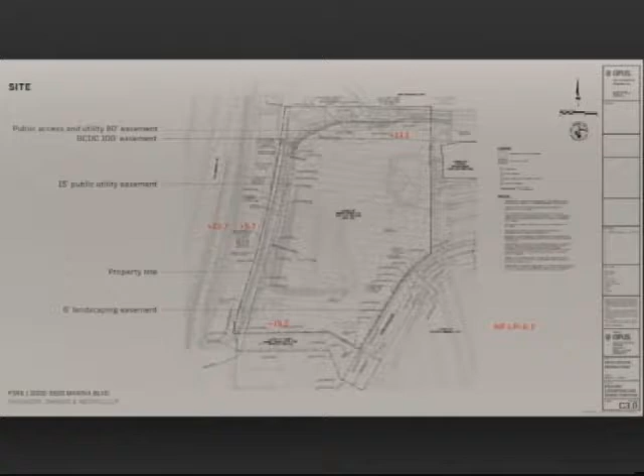Let me quickly introduce you to the site. North is up here - on the north side we have the bay, and on the left-hand side we have a slough, an important body of water running almost the length of the site, down in a ditch. We have neighbors to the right and to the south, and access to the road. There's a small easement on the left side of the site, and BCDC easements along the north, and now we think along the slough side too. This was a previously approved entitlement for the site.

Those at home can't see the model, but I'll just hold it up for you.

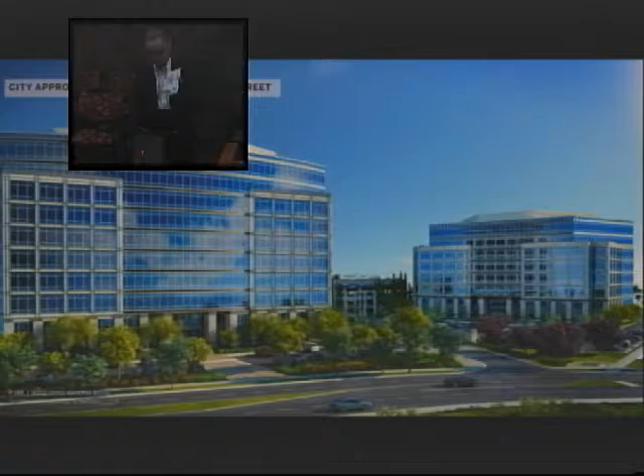This was the previous proposal: two office buildings, a 10-story office building, an 8-story office building, and a garage. The garage ran along the west side of the site on the 101 side, with surface parking between. In our mind, this was a suburban model in terms of on-site parking.

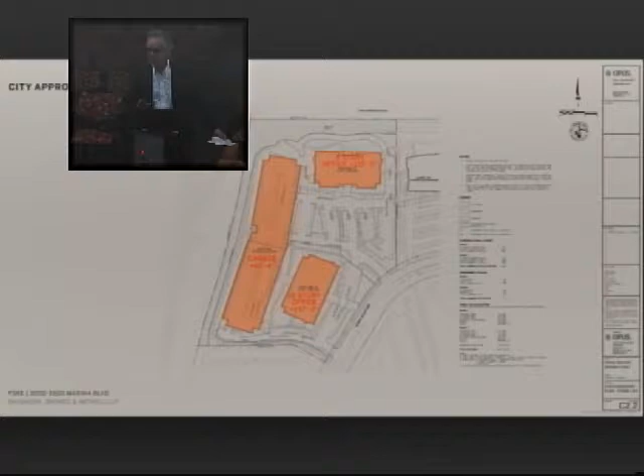It also presented the parking garage to the 101 side. In our feeling, it didn't necessarily embrace the bay, the bay trail, or all the public amenities we saw were possible on this site.

This is the view from 101. You can see the garage in the foreground here, and then this is the site toward the water side.

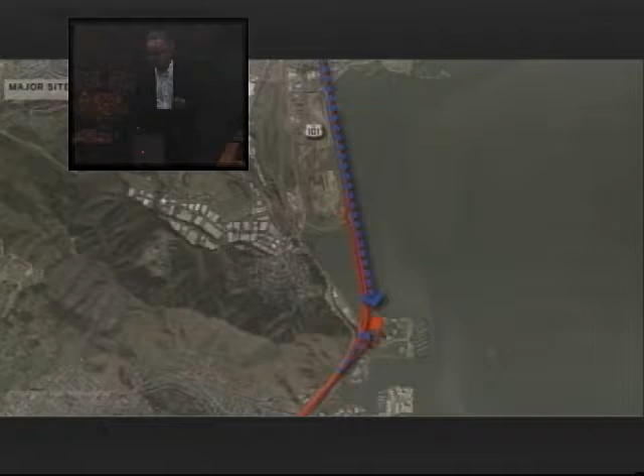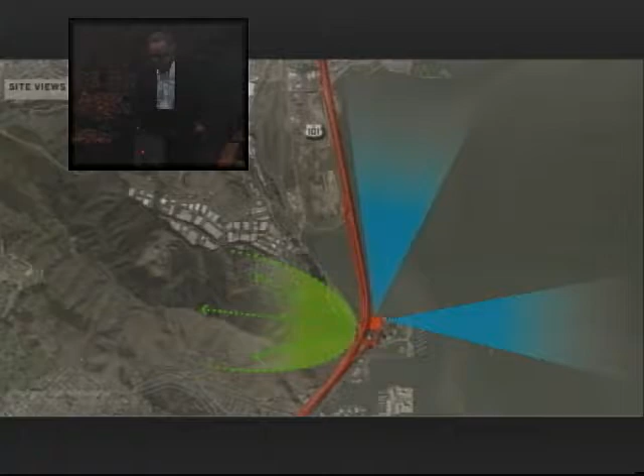From our point of view, this site has incredible visibility, so we want to make sure we take advantage of that on 101. The site also has incredible views toward the bay, toward Oakland, and back toward San Bruno Mountain. It's really a terrific site, and we want to exploit those views and take advantage of them.

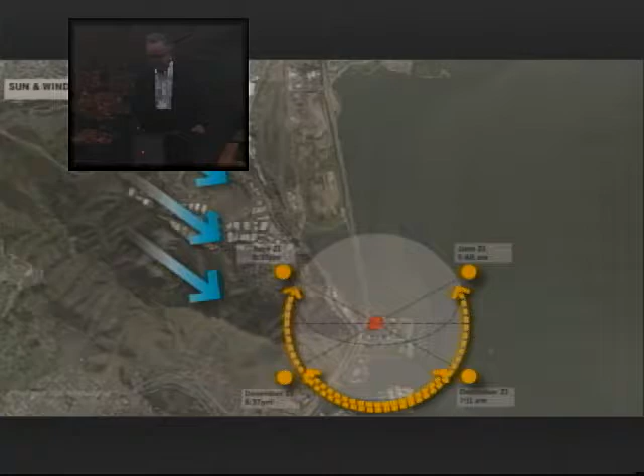We are aware of the wind and how it comes down the side of San Bruno Mountain, so we want to protect any public spaces that we can. We're also very aware of how the sun moves through the site, so we want to make sure the public spaces get as much sun as possible.

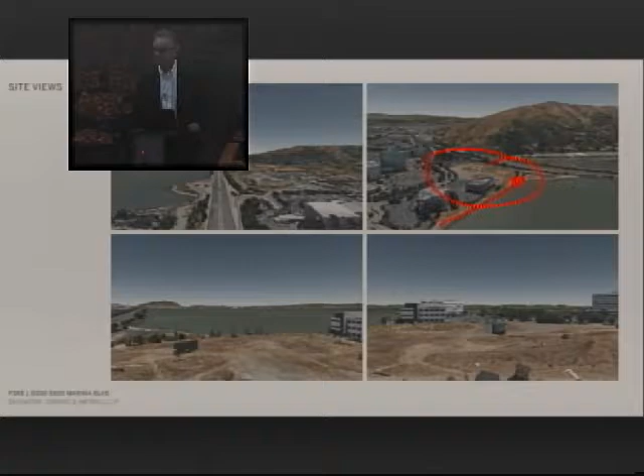As Mike already mentioned, this is a life science building, but it's also a life science campus. What's been very important is bringing other amenities to the site: fitness, dining, restaurant, and event spaces.

Creating not a standalone building, but really a series of buildings that work together, opening a lot of these public amenities to the public and having that be part of the life of this campus.

We have parking, and we'll show you this. This is built over fill, so we are actually building up from this site. We can't go down—we have a clay cap they have to deal with here.

We're a life science lab office use, so rather than targeting—last time we were here we had a long discussion about parking for office spaces versus parking for lab spaces. Lab has significantly fewer people involved, as well as the client's experience with their property just down the road in South San Francisco.

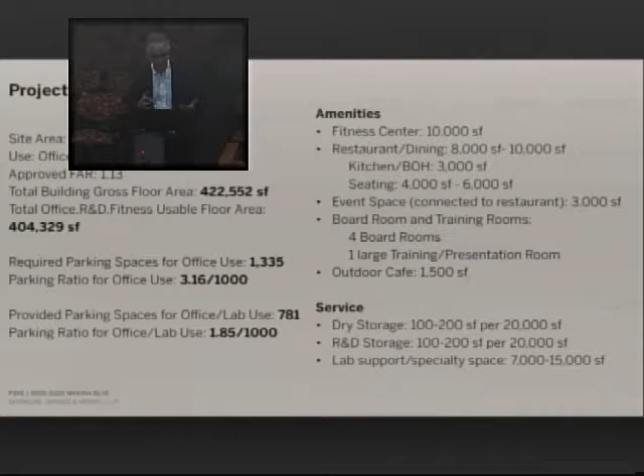In terms of what they're seeing in terms of uses, we don't want to overbuild our parking lot. We'll go into much more detail on parking in a moment, but we're providing 781 spaces, roughly a 1.8 to 1,000 parking ratio.

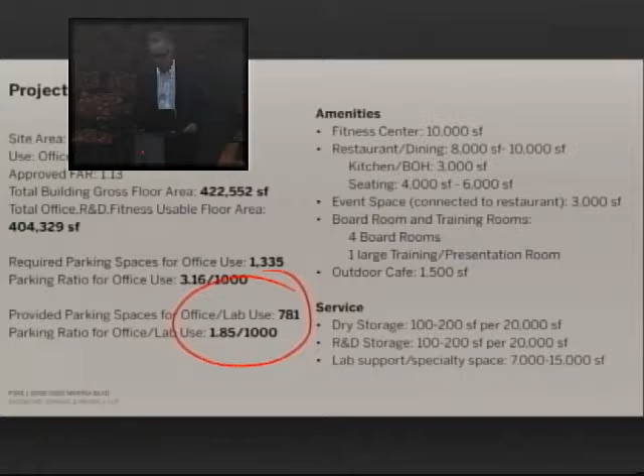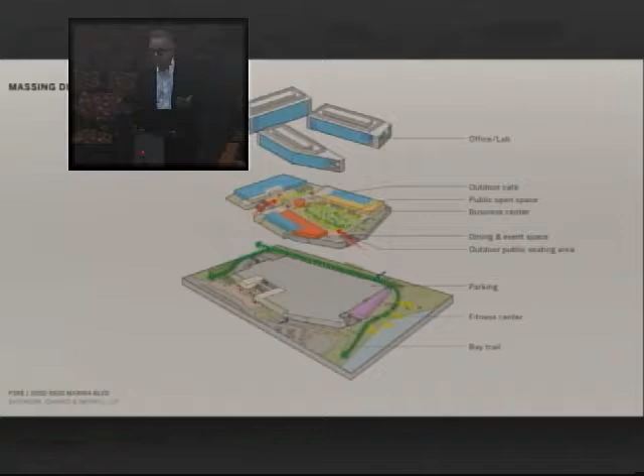When we last presented, the ideas were similar, but they've been modified. This is a drawing we showed last time. It shows the bay side on this side. We have two levels of parking.

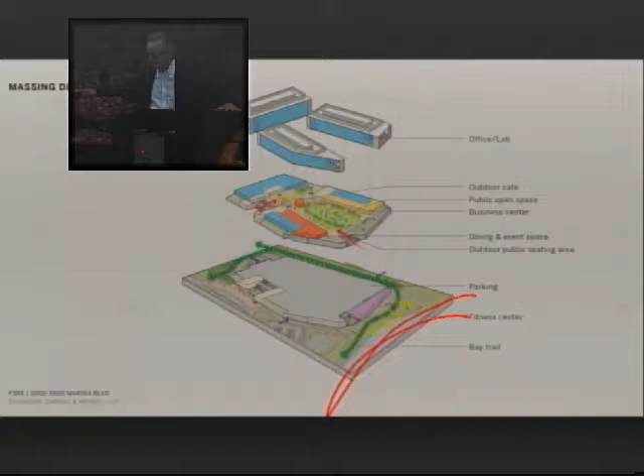We have an outdoor public space that serves as a courtyard above that, and then lab and office buildings on top. This gives us a chance not to spread the parking out all over the site, but to actually build a public space, an open green space in the middle.

There are other amenities we'll go into more detail on, but we have a health club right basically at grade along the Bay Trail, and developing those amenities adjacent to the trail has been important.

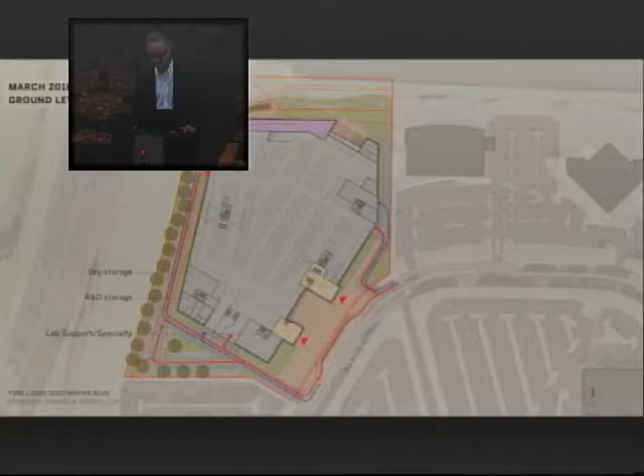This is our ground floor plan, where we have a lay-by along the street here, entrances to two of the buildings. The red lines show the access to parking.

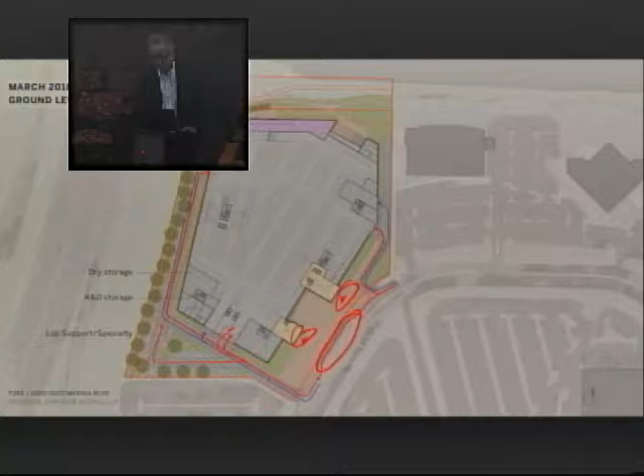The blue lines show the access to service, so we have service loading docks under each of the buildings.

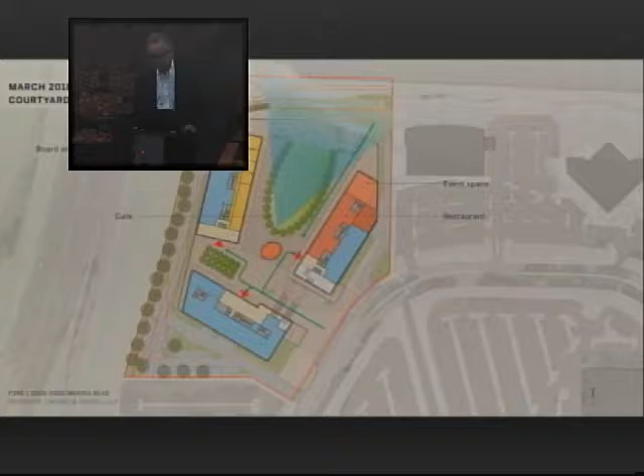If we go up two levels of parking, we have this open space with its view toward the bay. As you stand in that space, you really look right toward Oakland that way, and up toward Candlestick the other way.

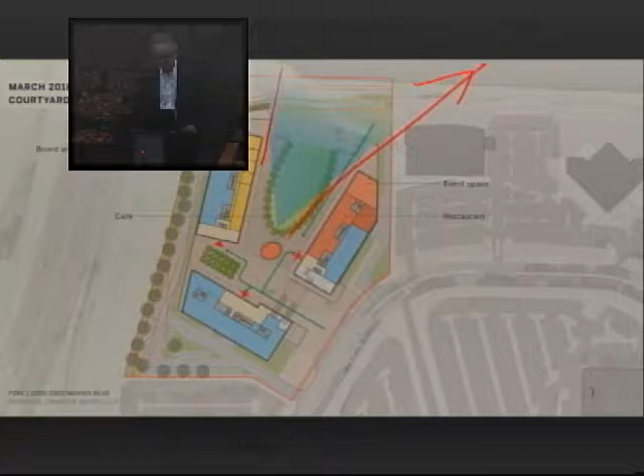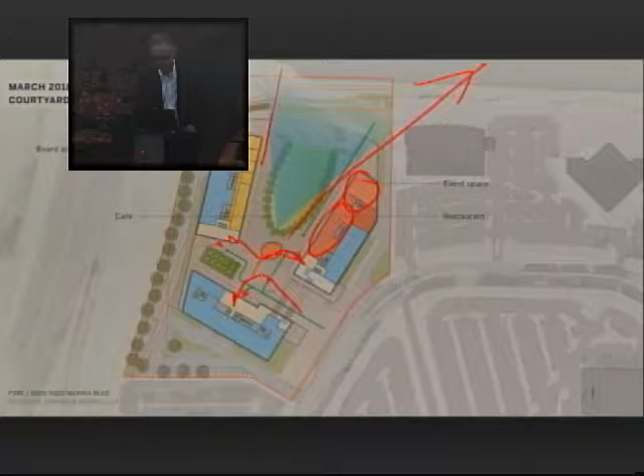We're able then to move up into the courtyard, into these office lobbies. On this level we've loaded restaurants, event space, boarding, and a cafe in the middle. We're trying to activate the edges of this, and we see this as open not just to the users of the building, but to the public in general.

As you know, currently Sierra Point doesn't have a lot of amenities, but the idea of creating a raised space where you can see out over the water and connect to the landscape, we think not only enlivens this project, but could help enliven Sierra Point in general.

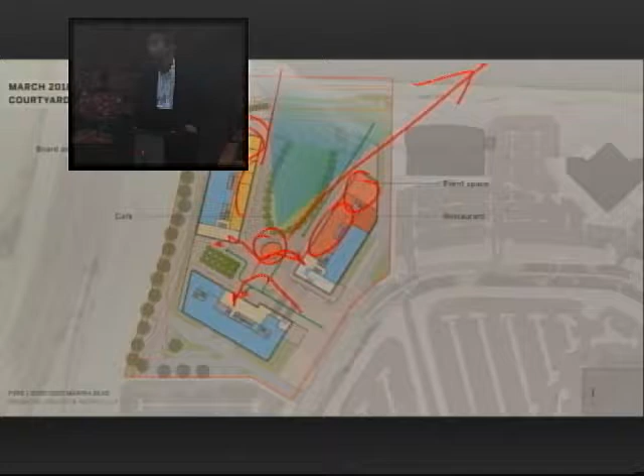This is the previous plan. We'll show you some modifications. We had 120-foot wide bars of lab and office, and we've modified that now a little bit, thinned it out.

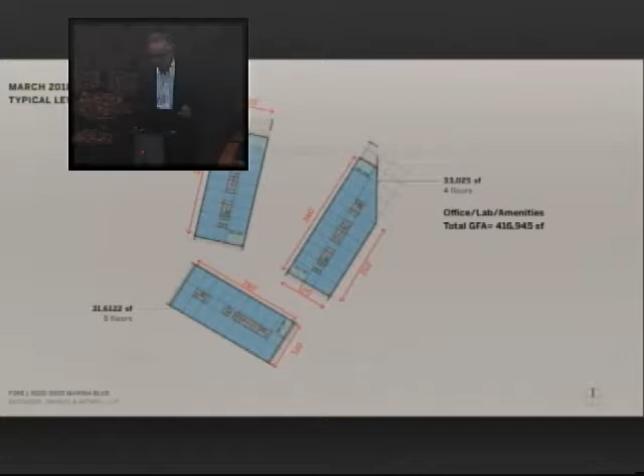Let me tell you some of the comments we heard both from your commission and also from BCDC, which was really focusing on the public access and public amenities. One issue that came up was disabled access, ADA access up to the upper level. We were relying on elevators, so we've now added a ramp that will get you up from the water side. We are providing additional amenities.

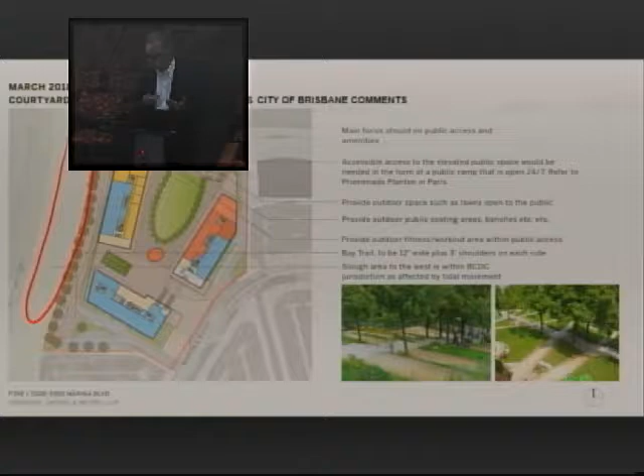I want to emphasize the conversation we had, both in our smaller working group, about the slough area directly adjacent on the west side. This is a sensitive part of the bay, and there's a lot of concern about how that gets used, how close development is to it, and what the Bay Trail does, and whether it comes too close.

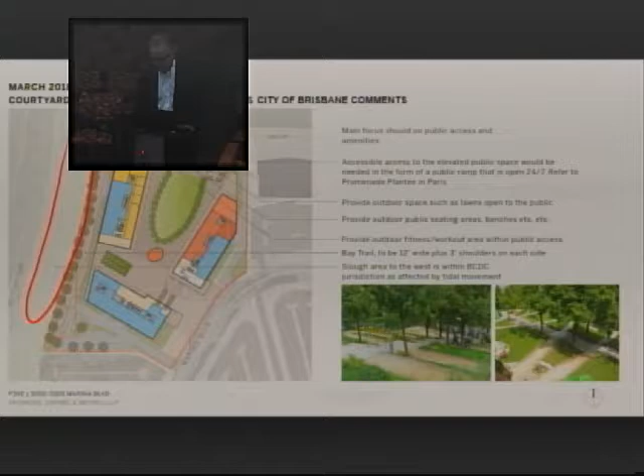There's a lot of contours in there, and in our previous proposal we had a couple of retaining walls that were, I think, a point of focus for us. So we looked at that carefully, and we've stepped back a little bit to see what we can do to improve that west side.

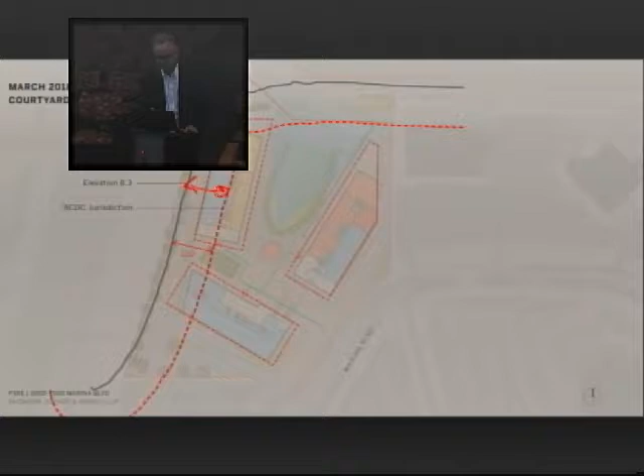We've stepped back our project roughly about 60 feet from where it was. You can see this is the 100-foot setback for BCDC, and we're taking that as a guideline, stepping back from the west side, from what would be the high water mark along the BCDC side on the left, and we've moved our whole buildings tighter, stepping out of that zone.

We're doing this for a couple reasons. One is when we tried to get our road, our fire access, and then a BCDC wide trail - which was a bike lane plus a walking zone plus some buffers - we ended up having to put retaining walls out, still on the property, but into that slough zone. Our strategy now was: let's just not touch that.

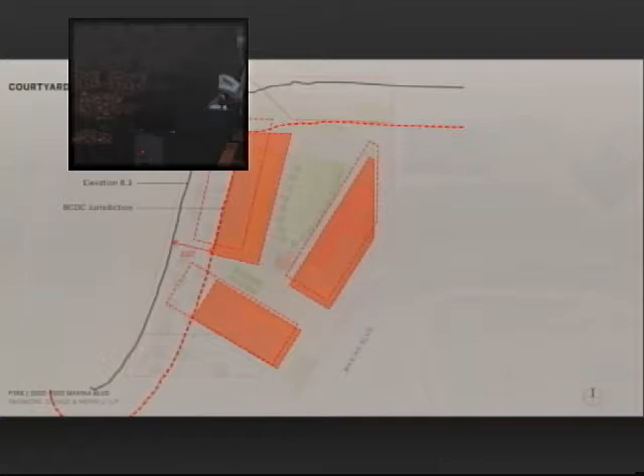Let's step back and give enough room for a trail, basically following the existing grades, with enough buffer zone, and we'll move our building back. We had our courtyard in the previous scheme, something like this. Now we're squeezing the buildings a little bit closer, so the courtyard is something like this. I think the essence is still there.

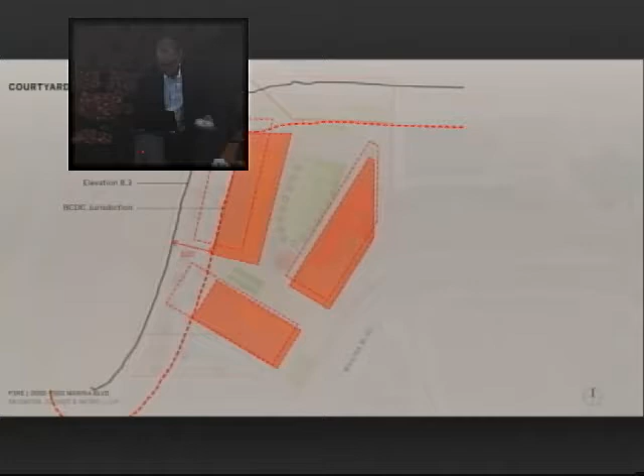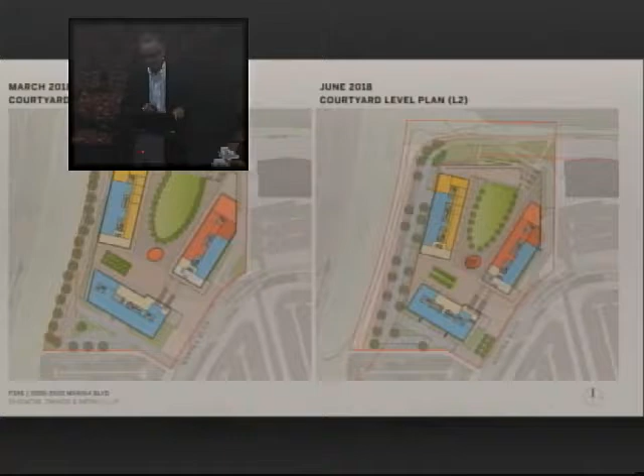Let me go over some of the details and the impact it's had on the project. Here are the two plans side by side, with our previous plan on the left and the new plan on the right. You can see we've stepped it back. Of course, we've lost two levels of parking inside the parking garage, but we've replaced that with some at-grade level parking. That's provided us a little buffer, a little setback zone along the western side.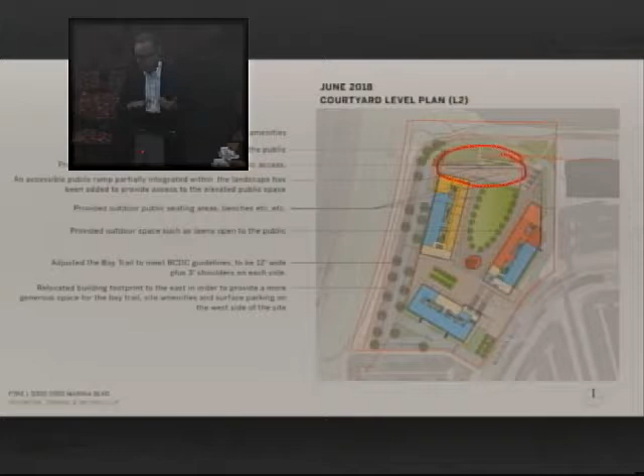We've also added a ramp access - maybe a little hard to see here, I'll focus in. Since you're going up two levels, it's quite a long ramp, but we've embedded the first part of the ramp in the earth, in the landscape. We come up to a landing, with a set of stairs that connect down here to that landing. It goes up, then comes to a terrace level just a little bit below the upper level, and then you take the last step up.

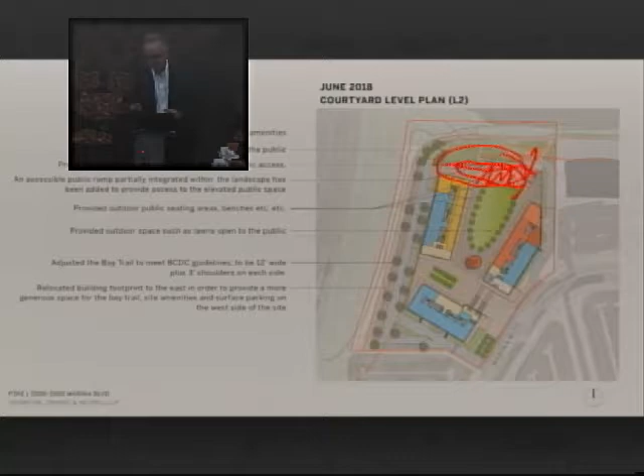We're doing this for a couple of reasons. We wanted to be able to step the site down toward the water for sight lines when you're in the courtyard. We also wanted to zone the courtyard, so we have a green area - more of a picnic green in that elliptical area - and a lower seating zone that looks over the water. Then the ramp comes down and the health club is underneath that, so this is sort of stepping down the terracing here.

We've also provided outdoor seating and a bit more recreation area in front of the health club, so the health club can spill out, but also so people running along the BCDC or the Bay Trail can use that for stretching or a workout zone, maybe even with some workout amenities there. We've then continued the trail down the left-hand side outside the parking zone.

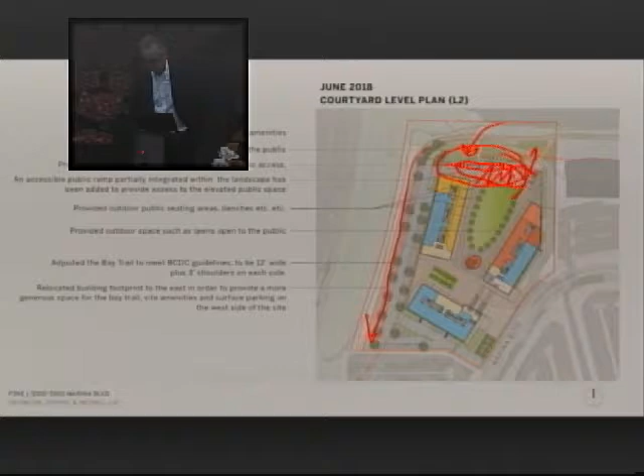This could be a really significant addition to Sierra Point. It's a little hard to see, but the green line continues the trail around and down. Phase 3 has purchased the site to the south, so we're working with them to extend the trail all the way down and complete the loop at Sierra Point, taking us down to the intersection just below the building on the lower left.

We would take that bike trail and walking trail and buffer zones and just continue it all the way down.

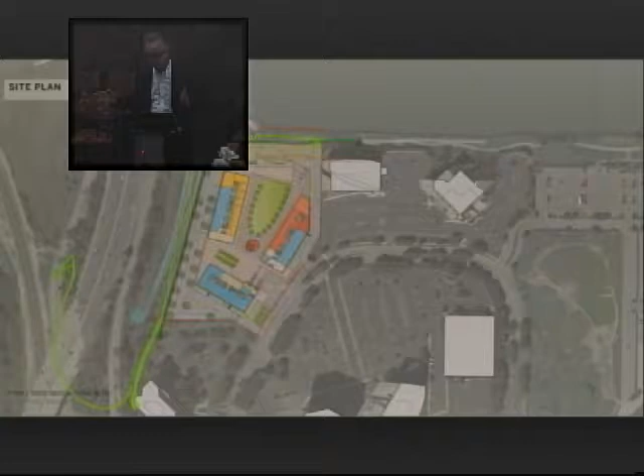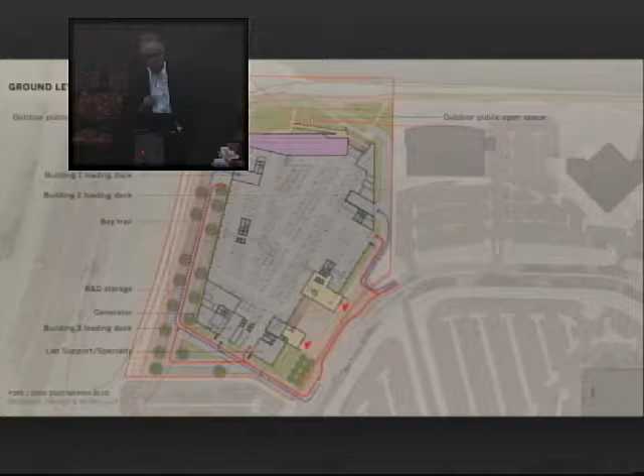This is the new ground floor plan. You can see the access is similar. We're probably providing some bay access parking at the very end here.

We have 781 parking spaces on the site. We have access to the parking directly adjacent to us on the property below. We have 127 surface level parking spots outside the structure.

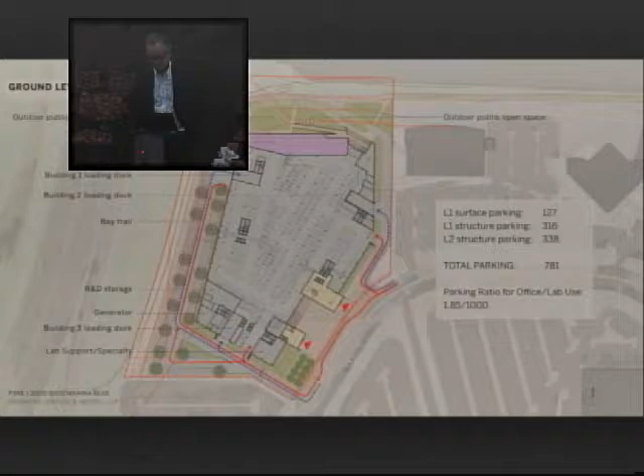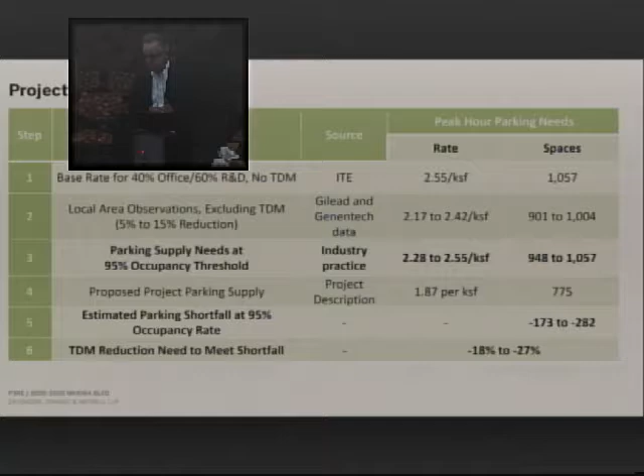We can discuss this in more detail, but we're looking at parking demands and comparing other parking opportunities in terms of office and estimated supply and TDM reductions. We'll swing back to this, and maybe Hardik can talk a little bit about that, and potential TDMs we can work out in more detail.

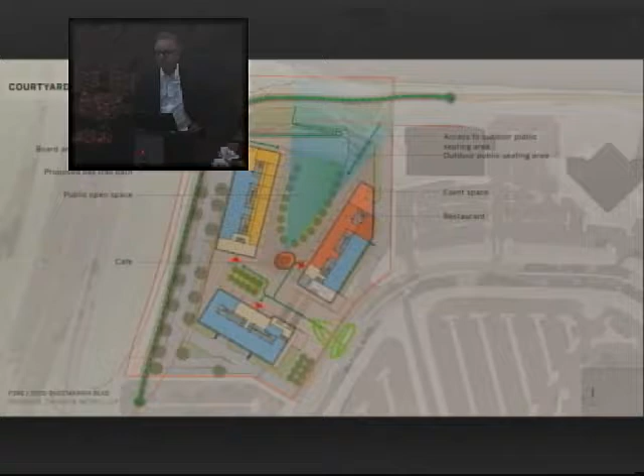We've also bermed the earth up against these two sides. Like the cascade of earth that comes down on the north side, we're berming the edge of the earth up against this face, so these buildings sit on top of a green base.

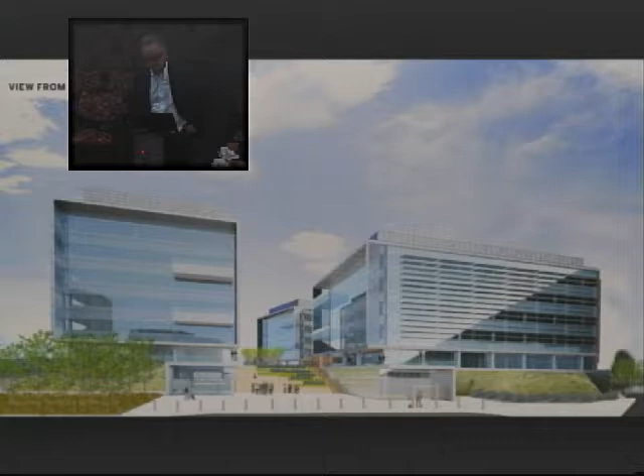We have a fire truck access that we need to provide around the edge of the building. The zone out by the bay, that dash zone there, we're doing in turf blocks, which is a planted surface that you can drive a truck over.

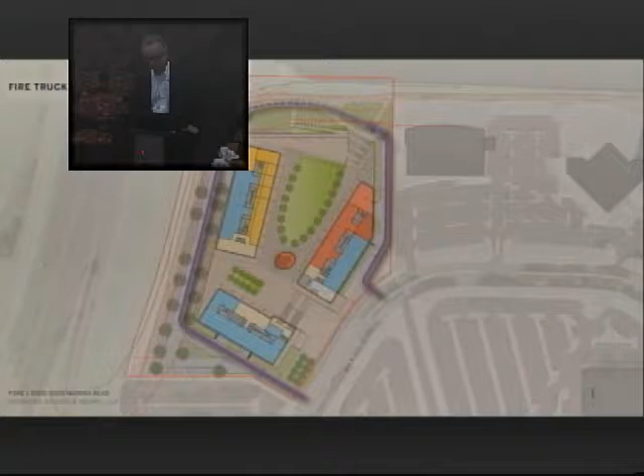A little more detail on the landscape. We are mixing trees in with the parking on the left-hand side.

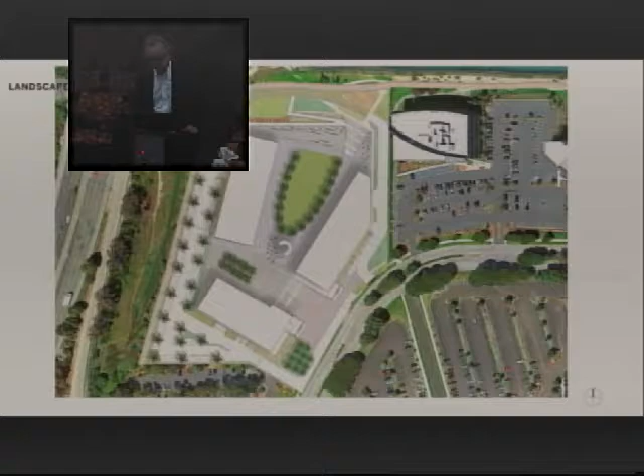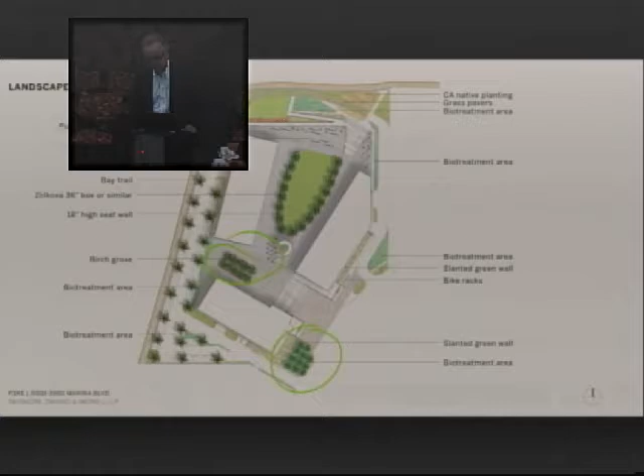The images below give you some sense of some of the elements we're using: the Great Lawn, the Creekside Bay Trail, the Birch Grove, and these slanted green walls along the side of the parking zone.

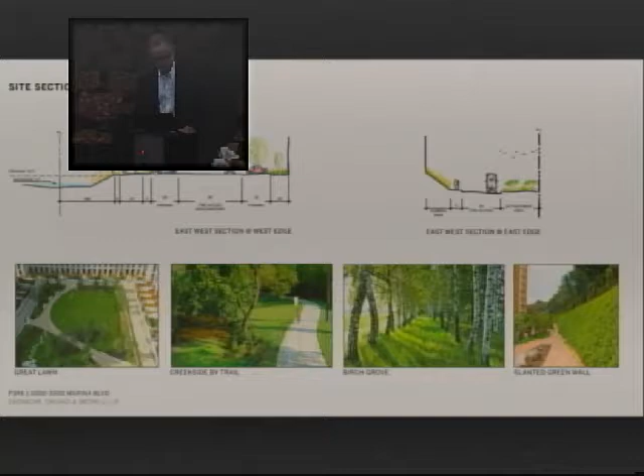The left-hand section is the section by the slough. Let me zoom in on that a bit, it's hard to see at this scale. We are following the existing grade down in this area on the left-hand side. We have 3 foot of buffer, 12 foot of bike path and walking path. We have parking on either side, and then 10 foot of a bio-treatment planting zone up against the building face.

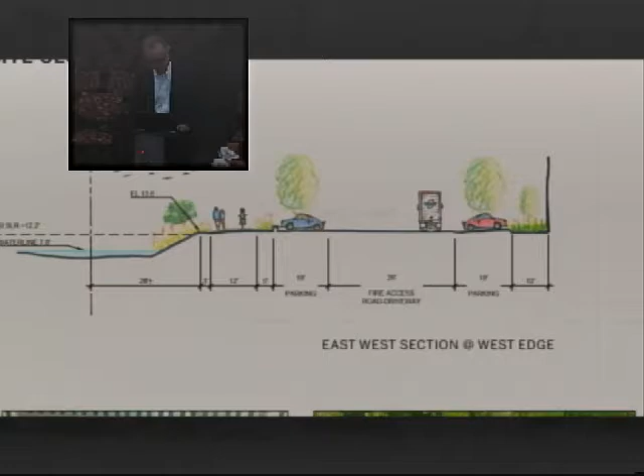On the right-hand side, this is on the east side of the building. You get a sense of maybe that embankment, raised surface planted on the slanted green wall that helps to take some of the visible height out of that wall.

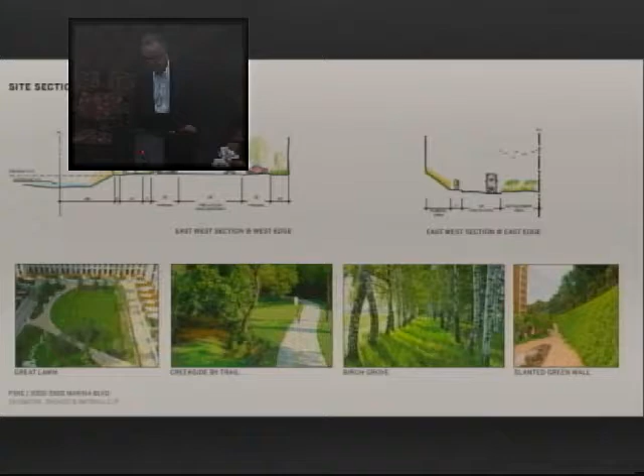One of the questions that came up within our discussion, and as we were going through the previous CEQA mitigation measure, was a fence that was requested along the edge of the slough, and there's what they call a clapper rail fence for clappers that are within the slough area, and we've been discussing with BCDC whether that is the appropriate solution.

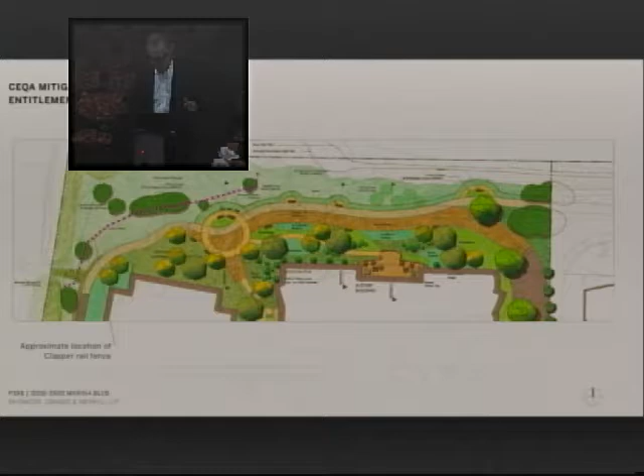We could extend a fence as the dash line all the way along the edge of the slough. It's really to keep dogs and people from wandering down in that area. On the other hand, it does kind of visually prohibit people from seeing that. So our discussion with BCDC was, is there any other solution rather than a fence? Can you do it with planting or stiff planting or something that wouldn't be so prohibitive in terms of allowing either visual access or physical access out to that site?

So that was kind of a requirement of the previous CEQA approval. We're hearing from BCDC to come up with a different solution that might be more of a planted solution. There is a fair amount of grade there if you've walked this site, so it doesn't necessarily encourage you to walk down there. It's quite steep, sort of a 3-to-1 at the moment. So we wanted to at least make you aware of that issue, and we're looking for maybe a more planted solution that would not necessarily have to be a physical fence. But that's one issue that's come up in our discussion.

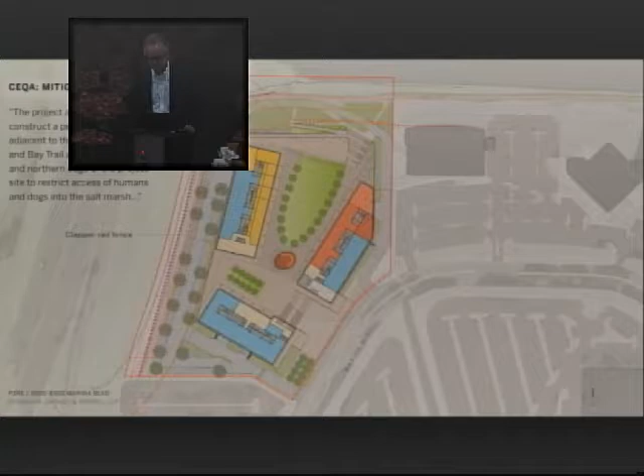This is our floor plans. It gives you a better sense of how they lay out. They're a little bit narrow, a little bit closer. And if we look at the sort of dimensions, they're about, at the narrow point, 84 feet away from each other.

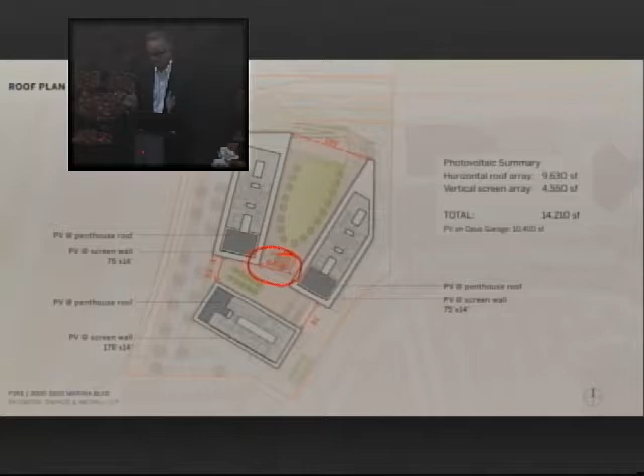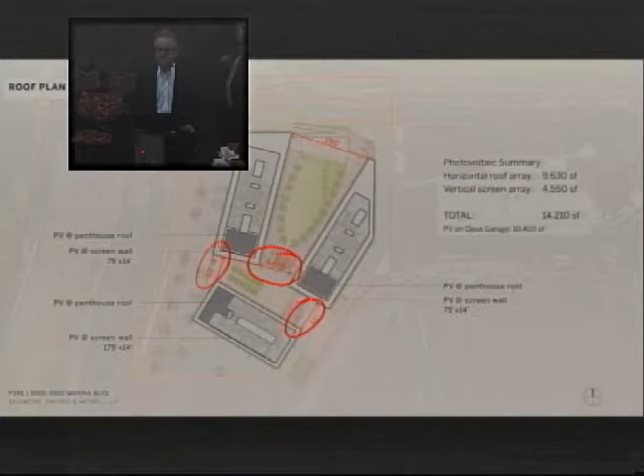Yeah, sure, yeah, that's a good point. Could you speak into the microphone, please?

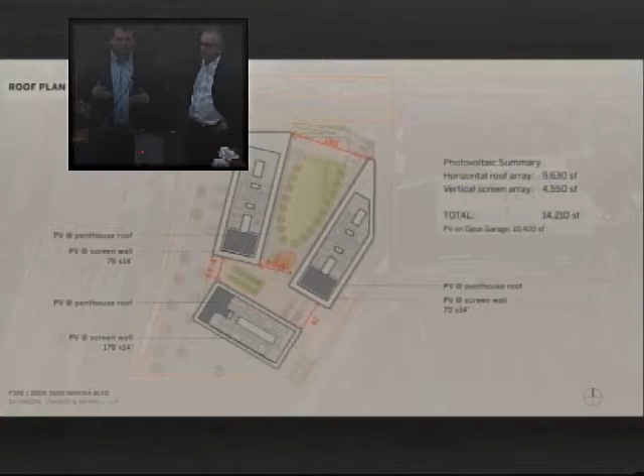Something that came up in January and has been sort of part of this project for quite some time is there's a photovoltaic requirement, and there was a question of, okay, well, if you get rid of this 5-story parking garage, which if you had seen the original plans, there was a center island that had photovoltaic cells. So we went and measured that, and it was about 10,000 square feet of solar. And so we set a project goal to exceed that and find a place on campus to put it.

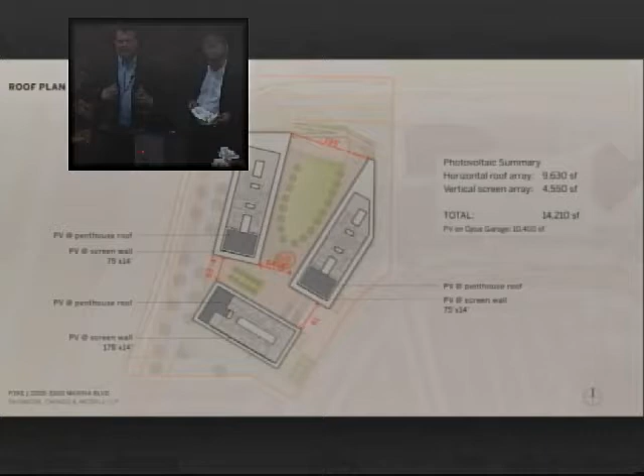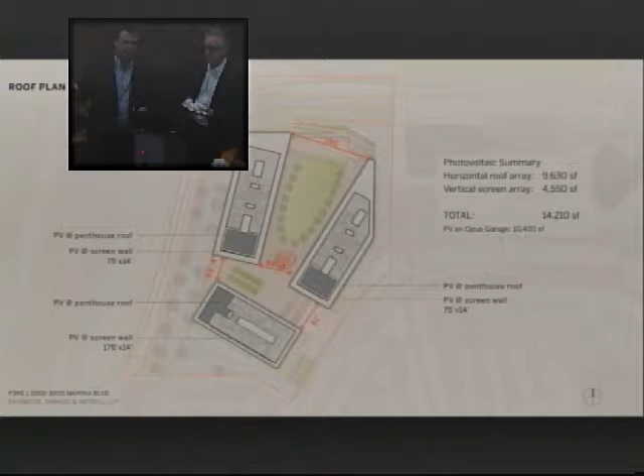And so we did a number of studies, and we found out how much area we could fit. One of the differences between a life science building and an office building is we have a lot more equipment on the roofs, and so that would be limiting. So we came up with 2 strategies: we'll maximize the area that we can put it horizontally, but because these buildings do get great southerly exposure, we'll also put some vertically. And so we can actually get 14,000 feet under our current scheme of solar to meet that requirement that we know was a target for the prior project.

And so we wanted to share that because I know that was a question last time that we hadn't looked at. And so this would be our strategy to live in the spirit of the old ones, even though we don't have that big 5-story parking garage anymore.

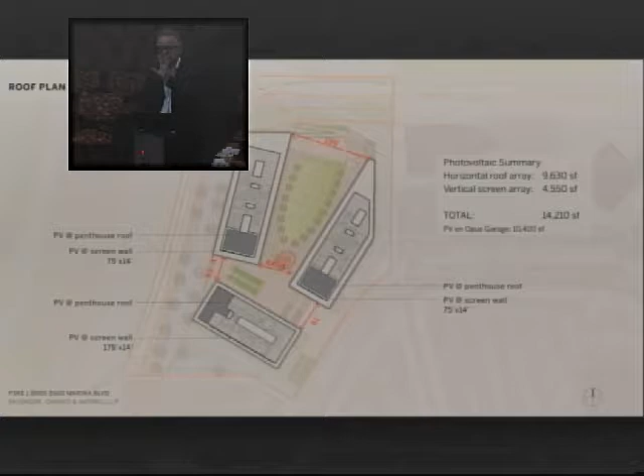And you can see the area on the slides then where we are showing in plan where that can happen. We have obviously a lot of equipment on the roof here, but we think on the south side of these buildings we can add additional PVs on the wall.

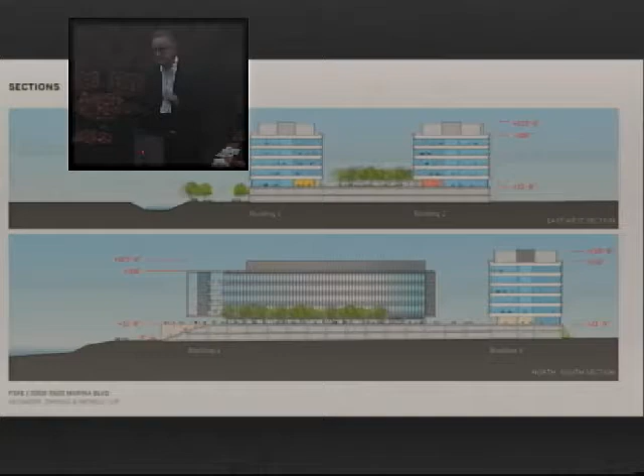This is the section through the project. The bottom one is north-south. Get a sense of what the space is like and the sort of scale. We have an arcade that runs along really 3 sides of the public space, so that allows you to kind of move out of the rain or in cover around the edge of that public space. And then the color blocks, the red and the yellow, show the public uses that we're putting underneath that courtyard.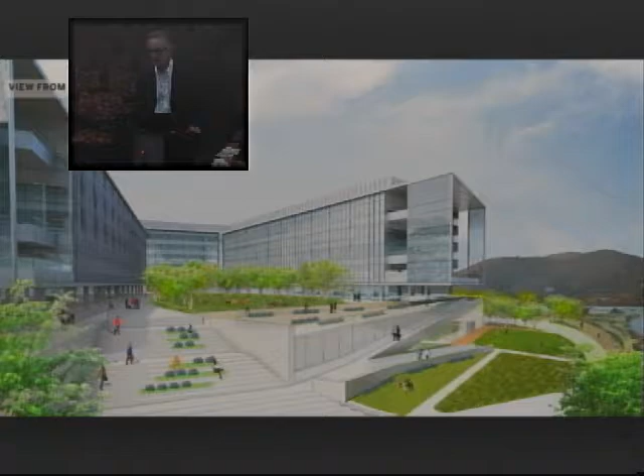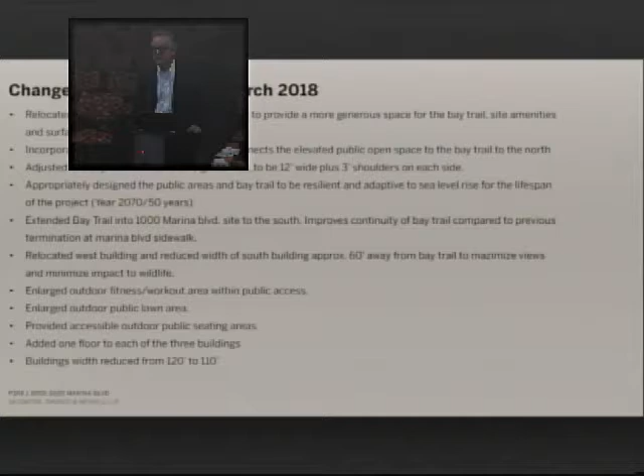So that's a bit of a quick walk through where we've been in the last few months. We've just outlined some of the highlights and the changes since we last got together. We've raised the building up, we've stepped the building back, we've enlarged the public amenities and the access to them, and we've done our best to really get the public spirit of the building that we talked about some months ago.

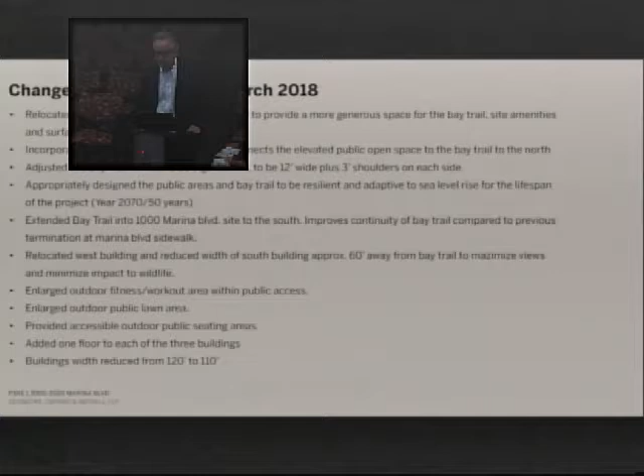We have a data sheet here in terms of areas we can go through, and a project summary here. And if we want to talk more about TDMs and parking, Hardik can address those here. I don't know if there are any questions in advance of that, though.

Why don't we just hold that thought for one moment? Did you have more? No, I didn't.

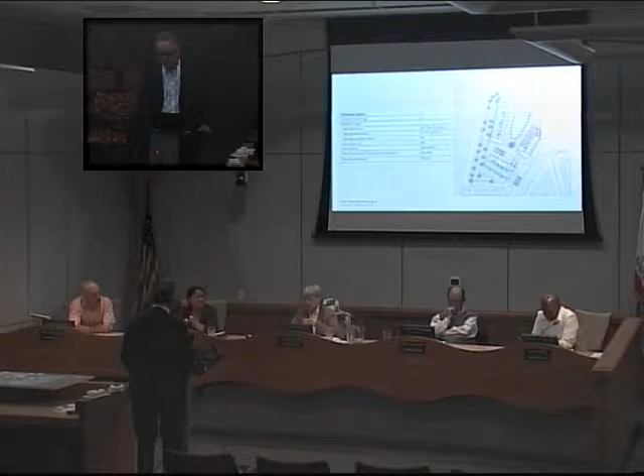Okay. I just want to compliment you because the last presentation you did earlier this year, your attention to detail is really quite impressive. And the other suggestions and questions addressed by the commissioners, it seems like you've investigated all of those, including the solar.

Yep. And I do recall members of the public expressed concern about the slough, wildlife, building, lighting, glare, noise. So that setting back 60 feet solved a lot of that.

A couple things, it's troubling to me because some of the newer commissioners didn't have the benefit of your earlier presentation, but I just wanted to give them an idea what was different about your project. As I recall, you create life science buildings that tenants can come in and do customized spaces. It's not one business. Could you address a little bit of that?

And as I recall, you are also part of the Genesis group down the road. Just a little bit of what this is, because you've mentioned campus, but we got a little bit more idea in the previous presentation, just for the benefit of the rest of the commissioners.

So one thing that when we say life science, we're really talking about basic research companies. What's a little bit different about what we do versus many of our competitors is we at Phase 3 actually will build this to what we would call a ready to occupy state. So if you were to walk in our labs, and we'd obviously welcome anyone to come tour them at the Genesis project.

There's 6 stories of laboratories in the South Tower, and the North Tower, the 21-story building you're going up, will have 20 stories of laboratories. But if you were to go into them, they look very much like your high school science labs.

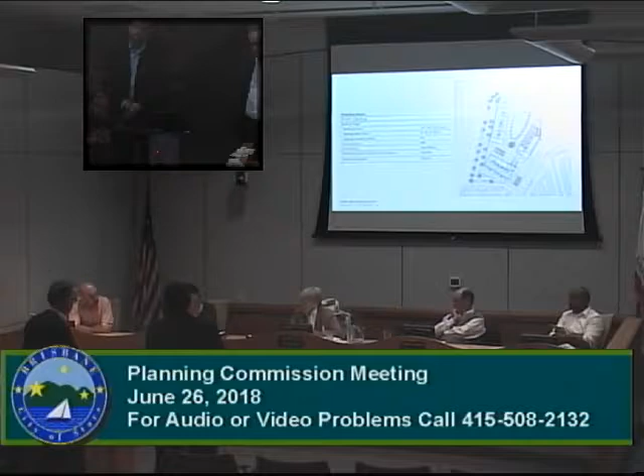Okay, so I think maybe to start the conversation here from the commissioners, I think it's probably best if the two of us who were here before start with questions. And I'm going to just take the lead on this because from your presentation I had a couple instant questions. One was the parking. It occurs to me you have not changed the number of spaces, am I correct?

Hardik can speak to the exact specificity of how many we lost, but we did lose some. My name is Hardik Odani, I'm with SOM. So when we shrunk the podium size, we lost parking on 2 levels.

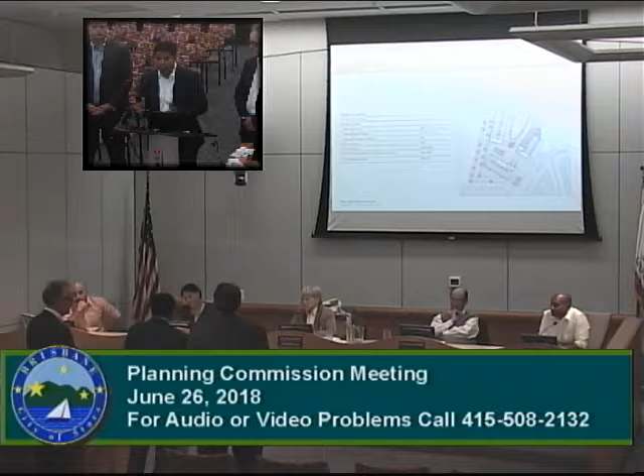We had about 870 parking stalls before. We did gain a few back on the surface parking, so we had fewer surface parking before. But now we're at about 127 surface parking and about 650 or so structured parking, a total of about 780 parking stalls.

And since we have you there, would you address the TDM, please? While they're pulling it up, I'd just like to say that one of our fears for this project...

I think at the earliest this project would likely be built and have tenants moving in the very, very end of '21. One of Phase 3's concerns, especially with the old parking garage and big parking garages in general, is we're sort of in a mode shift changing world, and stranded parking garages are a big concern in the general industry. We've seen in our own projects the parking demands dropping.

Because a lot more people are using Ubers and other modes of transportation today. And life science generally, Hardik can cover some of this, is much less. So for us, we actually are not concerned about the lower amount of parking because we believe with the TDM and with what's happening in the world over the next few years, we'd be better in this situation than having a very large amount of parking spots that never get used. So currently we have parking on the south side of the property.

Could you please clarify, it wasn't clear to me where you moved some of the surface parking to? You mentioned there's another area now. So previously we didn't have any parking on the west side.

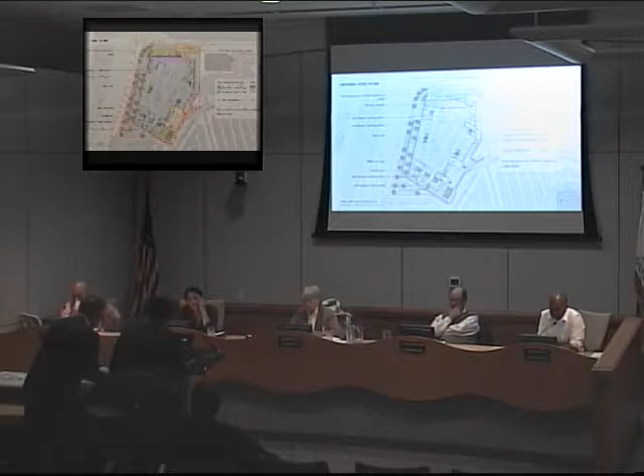When we pulled the buildings and the podium back, we were able to gain some double loaded parking along the fire truck access, over on the far west. You can see it in the models, in the previous scheme we really had just enough for access and barely the trail. This side in this model, you can see that we had pushed it right up to the fire access here, and we were putting a trail in, but it's pretty darn tight.

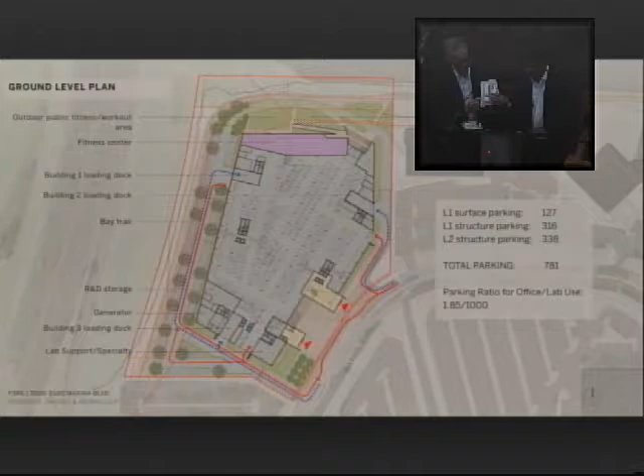Here we have pushed it back, and that 60 feet allows us then to have parking on 2 sides as well as planting on both sides. So that was the move. This is the additional parking that was now surfaced, but you can imagine we took approximately that much out of the base of the building.

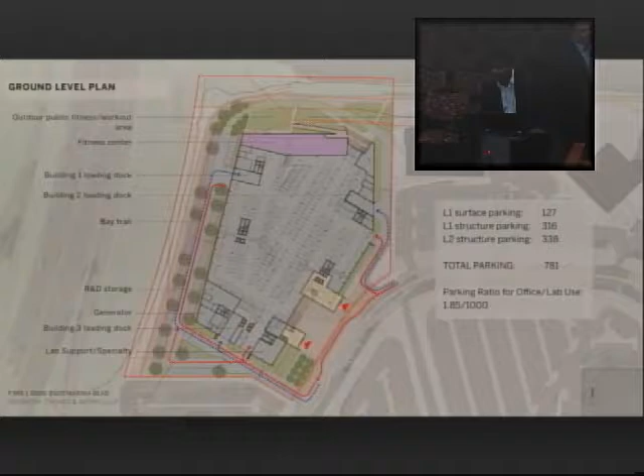So what that gets us is about 781 parking stalls at a ratio of 1.85 per 1,000 square feet. What we did is we took a look at what the estimated parking demand is for a life sciences lab and R&D campus, which is different from an office building. So looking at a 40 to 60% split between office and R&D use, we're coming up with a ratio of about 2.55 per 1,000 square feet, which generates a demand of about 1,057 spaces.

We also looked at data from adjacent campuses like Gilead and Genentech, and this data is normalized based on if there was no TDM measures employed on those campuses. Those campuses are coming up with a ratio of about 2.17 to 2.42, which roughly translates to about 900 to 1,000 spaces. We've also seen that the threshold seems to be at 95% occupancy for these campuses, which again translates to between 950 and 1,050 spaces.

Like I said, the proposed project has about 775 to 780 parking stalls. So we realize there's a shortfall of about 173 to 282 parking stalls, and this is without employing any TDM measures. This roughly translates to about an 18 to 27% shortfall that the TDM measures would have to cover.

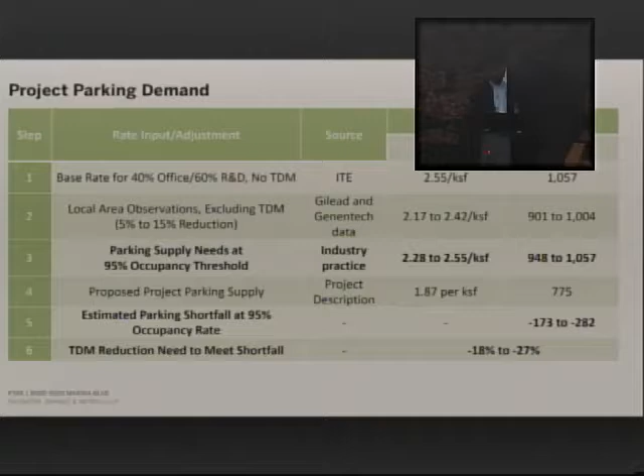So we looked at some potential TDM reduction measures. Right off the bat, the Sierra Point shuttle service currently provides a reduction, it's used by 14% of the employees in Sierra Point. So that itself provides a reduction of 14% in the parking.

We've looked at other future strategies like parking cash out, subsidized transit fares, voluntary commute trip reduction programs, subsidized ride sharing, carpool matching, bicycle parking, bicycle repair stations, bike share memberships, and on-site car share spaces and subsidized memberships, which per the California Air Pollution Control Officers Association can lead to a reduction of about 16% of the parking demand. So combined, these measures could result in a potential reduction of 30% of the parking requirement, which would exceed our threshold for a targeted reduction of 27%.

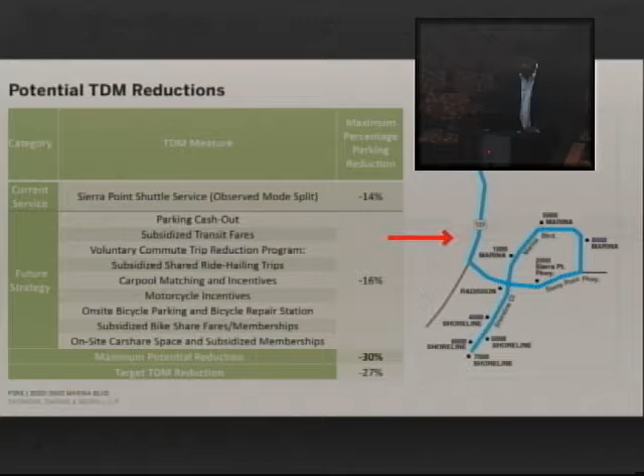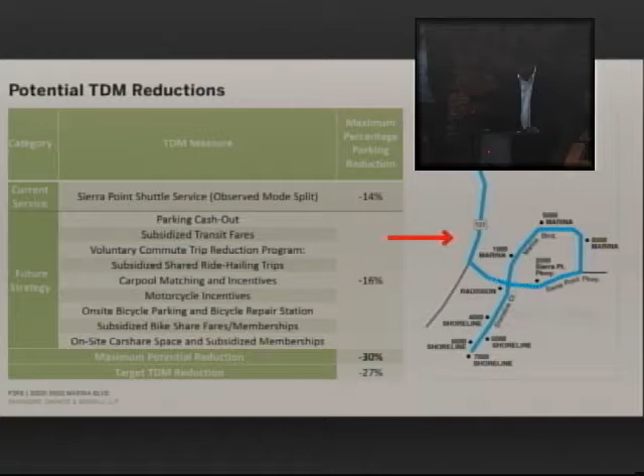You spoke about having facilities on the property like restaurants and a gym. Is that going to be open to the public as well? If so, in terms of parking, does the space you're going to create account for visitors, or will some of the parking be allocated specifically for tenants and the rest for staff and public? How are you intending that?

Our thought is we would have some zone for visitors, and we'd have to determine how much that would be depending on demand for the restaurant and use of the health club. We have some spaces set aside for access to water, but we should pull those out of the calculation. At the moment we've been doing it as a lump sum. I think the primary users will probably be people in the building, but the spirit is that we want to open it to others, particularly those in the immediate neighborhood who could walk from their building or down the path. This area doesn't have a lot of options, but we don't see it as a destination restaurant, maybe hope, but not expect.

Right, but I'm thinking ahead that if you're not going to prohibit the public from using your gym or restaurant, what if they take up a lot of the space the employees expected? Just a thought. I think it's a good point, and we'll factor that in.